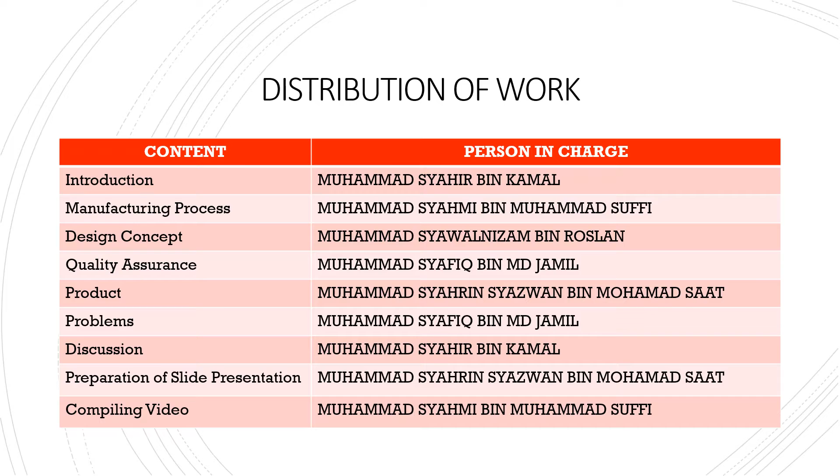We have been given the task to make a desktop research on a particular manufacturing company in Malaysia or abroad. So from our desktop search and discussion among the group members, we have decided to choose this company based in Japan. The name of this company is Kai Group.

In this slide, I'm going to give a basic introduction about this company. Kai Group is a company that forges blades, which has a history of over 800 years in the manufacturing of blades. The Kai Group was founded in Seki City, Gifu, by a man named Saijiro Endo in 1908. The head office for Kai Group was Kai Corporation, situated in Tokyo, Japan. Nowadays, the Kai Group president and COO is Hiroki Endo.

For the next slide, I'm going to give basic information about this company. Kai Group produces forged blades for cutlery, kitchen utensils, beauty care products, confectionery utensils, and many more. The registered capital for this company is about 450 million yen, with 8 industrial buildings in 5 countries, which are the United States of America, Japan, Shanghai, Vietnam, and India. The total number of staff as of April 2020 is around 2,538 people, with 43.9 billion yen in sales as reported in March 2020.

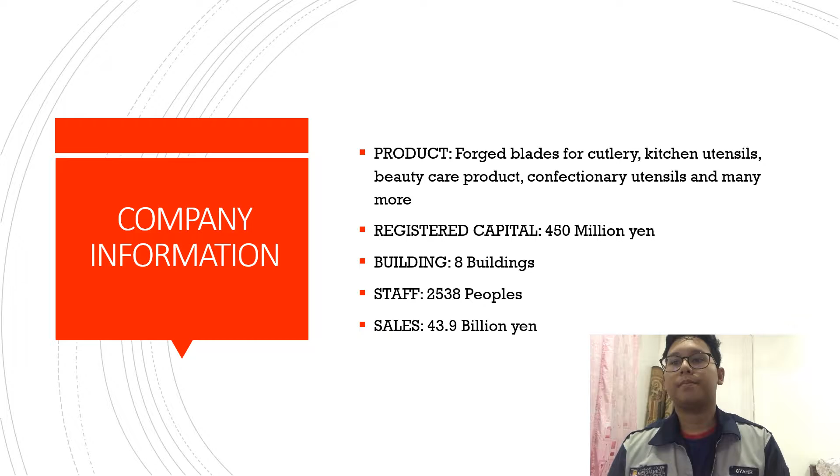Assalamualaikum warahmatullahi wabarakatuh. My name is [name] and I will explain about the manufacturing process that is involved to produce a knife. Firstly, it is about machining.

In this production, there will be 5 processes in machining. Firstly is laser cutting. A laser beam is directed to the material and cuts out the shape of the knife. It is controlled by computer where it will get finely cut, but it requires more time than the press working process.

Next is the thermal process. The workpiece that had been cut is heated at 1000 degrees Celsius in an electric furnace and then cooled off at water temperature. The knife structure becomes hard. After being cooled, the blade is heated again at 180 degrees Celsius. Blades become not only hard and tough but also elastic.

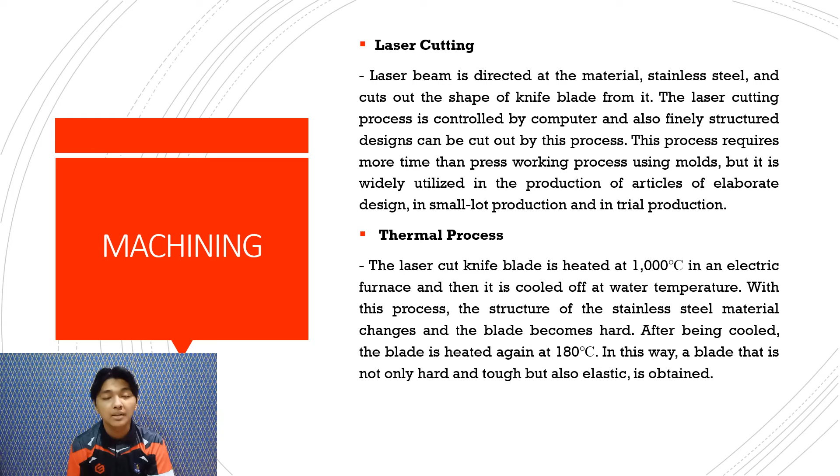Next is surface grinding. The periphery of the blade is polished with a polishing belt. The surface of the blade tip is thinly grinded. This process is important as it allows the blade to obtain a beautiful pattern.

Next is blade leveling or grazing. This process consists of polishing the blade tip with a particular polishing material, making it take the shape of a smooth hard clam. The entire blade is more finely polished.

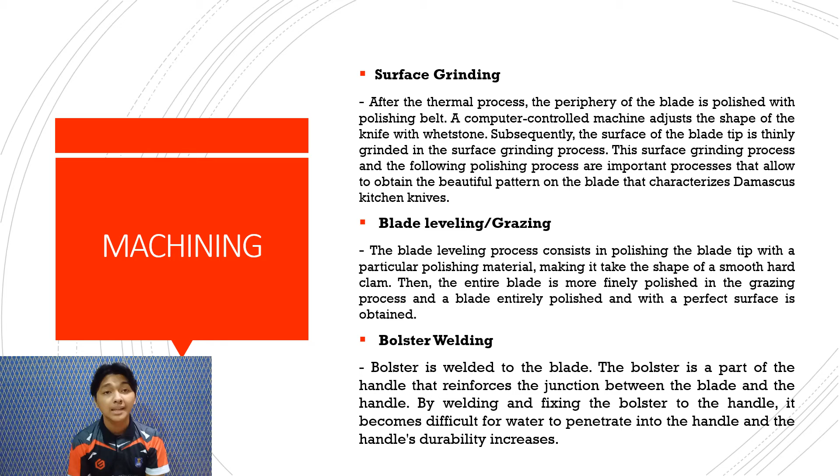Lastly, in machining is bolster welding. The bolster is welded to the blade. The bolster is part of the handle that reinforces the junction between the blade and the handle. By welding and fixing the bolsters to the handle, it becomes difficult for water to penetrate, and the handle's durability increases.

The next major process is assembly. In the assembling process, the handle and rear bolsters are fitted to the blade. Laminated wood is used as the material for the handle as it is excellently water resistant. To prevent the penetration of water, sealing materials are used.

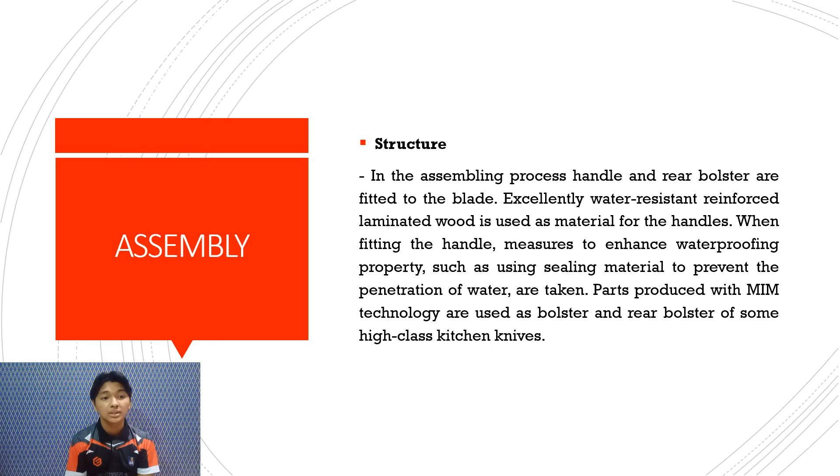The last major process to produce a knife is finishing. In finishing, there will be 5 processes involved. Firstly is mirror polishing or abrasive blast. The blade is inserted between 2 rolls and is polished until it reflects an image like a mirror.

Then, abrasive blasting process is done by spraying glass bead on it. The difference of surface roughness of soft parts and hard parts of the stainless steel is unique, giving the stratiform characteristic Damascus kitchen knives. The second process is wood handle polishing or bolster polishing.

This process is polishing the handle of assembled knives. The bolster and the rear bolster will obtain a beautiful smooth handle.

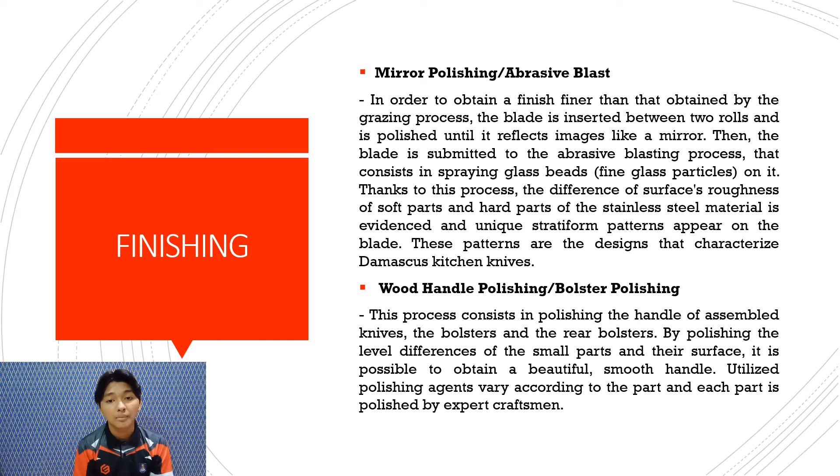The third process is printing and marking. Each kitchen knife has a mark printed on it which indicates its brand name and the lot number that enables identification of its manufacturing date. It enables identifying the history of utilized materials, and the date and time when each process was carried out.

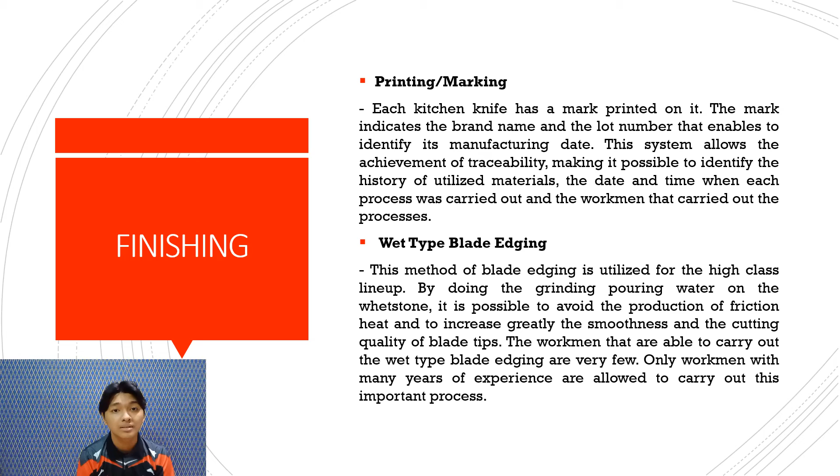The fourth process is wet type blade edging. This method of blade finishing is utilized for the high class lineup by doing the grinding, pouring water on the whetstone. It is possible to avoid the production of friction and heat, and to greatly increase the smoothness and cutting quality of the blade tips.

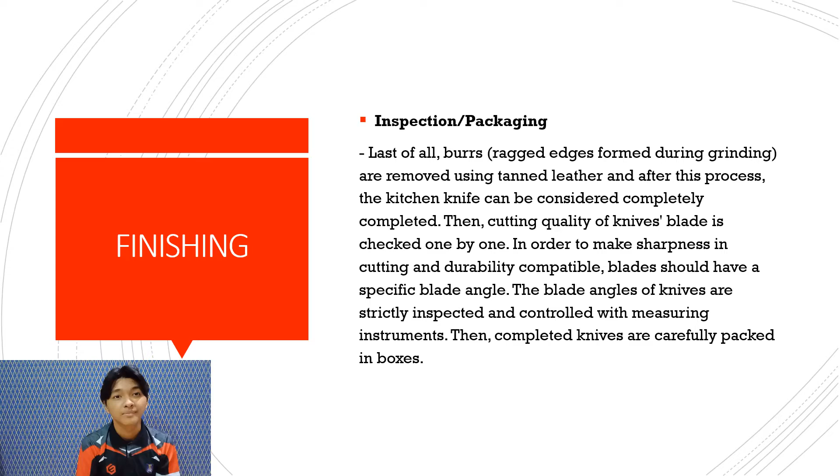The design concept of kitchen knife for Kai Group started with identifying the specific usage for the customer. The customer needs the kitchen knife to cut different things, which encouraged Kai Group to come up with new ideas for the kitchen knife design. This is because each thing to be cut has different stiffness, thickness, curve and size, which leads to producing different parameters and colors of the kitchen knife.

At the design level, the design process starts with sketching the idea. All ideas were laid out on paper to figure out the functional aspect. Once the basic concept suitable for the design has been chosen, the sketches were scanned and brought into computer-aided design software such as CATIA and SolidWorks.

From there, the sketch starts laying out the functional geometry in two-dimensional form, drawing the profile of the knife and adding the pivot location. Then the blade was checked to make sure it can open and fit in the handle. It needs utmost precision throughout the entire manufacturing process to make sure the blade fits with the handle.

Once all the process work out, the design of the kitchen knife was turned into a 3D model.

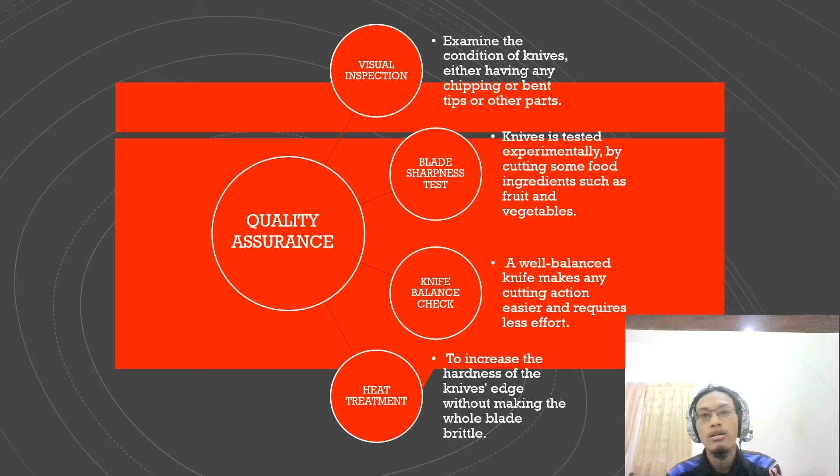Quality assurance can be defined as any systematic process of determining whether a product or service meets the specific requirement that ensures the product is reliable and functional to the customers. Here I will describe further a couple of quality assurance measures that this company might have done to ensure their product is the finest and functional once it reaches the customer.

Firstly is the visual inspection, where they examine the condition of the knife, whether it's having any defects such as chipping or bent tips. Secondly is the blade sharpness test, where they test the knife experimentally by cutting some food ingredients such as fruits and vegetables. Next, they check the knife balance.

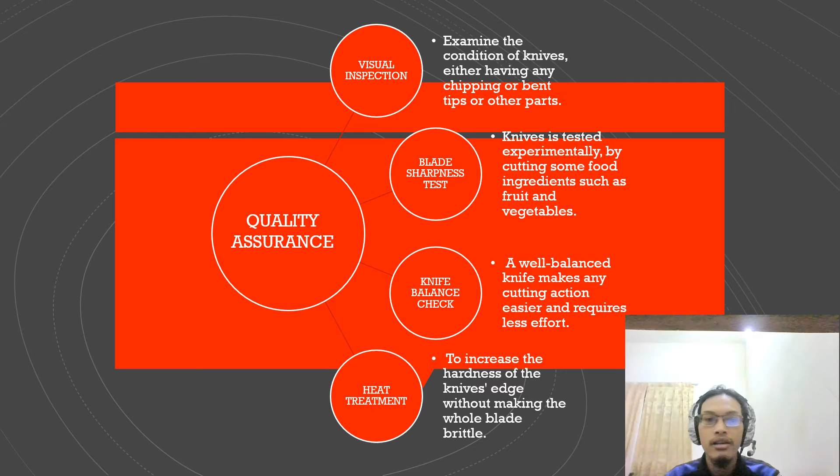This is to ensure the knife is well balanced in terms of weight, the ratio of the handle and the knife blade, so that it makes the cutting action easier and requires much less effort. Last but not least, they do a heat treatment to ensure the hardness of the blade is much tougher, without making the whole blade brittle.

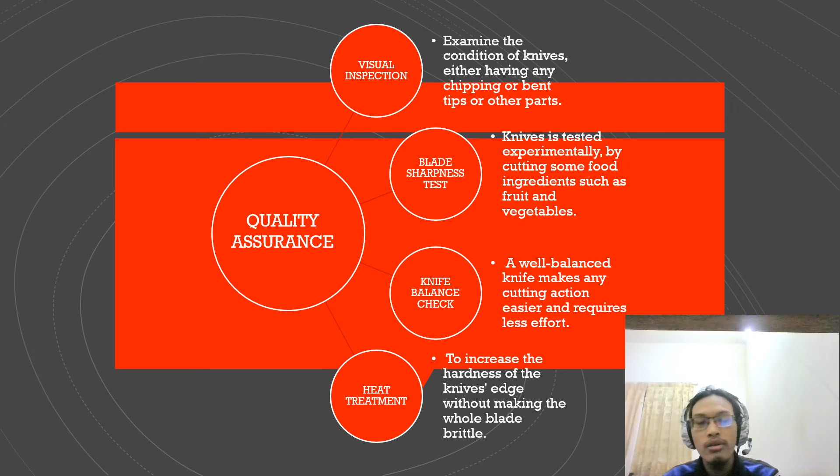Based on my search, Kai Group has produced some products such as razor, scissors, kitchen knife, and nail clippers. But in our assignment, we will explain about kitchen knife. In Kai Group, there are several companies that produce kitchen knife. One of them is Shun Company, while the other one is Sekimagoroku Company.

Both of the companies have produced some series for their kitchen knife. In Shun Company, one of the series is Shun Premier, which the blade material is VG10 stainless steel, while the knife handle uses a symmetric oval walnut wood composite design which can prevent the knife from slipping from the hand. This series of knife can be known by its hammer finish pattern, which has its own function of avoiding sticky knife.

An example for this series is the Shun PM paring knife 4 that can be used for peeling fruit and cutting vegetables, and the other one is the Shun PM utility knife 6.5 that's suitable for peeling fruit and cutting meat. This example can be shown in the image in the presentation.

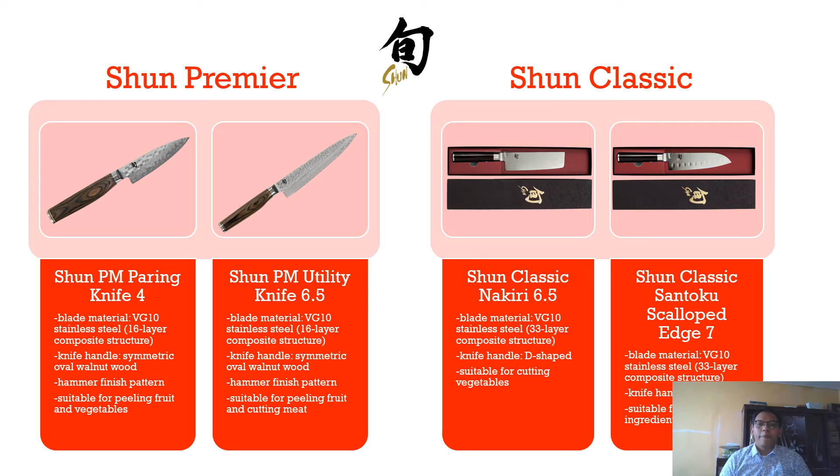In Sekimagoroku Company, one of the series is Sekimanju. The material of the blade used for this series is stainless steel, while the handle is made from plastic or polypropylene, which can handle heat up to 110 degrees Celsius.

An example from the series is the Sekimanju Nakiri knife, 165 mm, which has a sensitive cutting edge and compact blade that's easier for cutting vegetables. The other one is the Sekimanju chef knife, 180 mm, designed for conventional western style use such as shredding vegetables and cutting, slicing and cubing meat.

The other series is the cleaver knife. The material used for the blade is cutlery steel, while the handle has a D-shaped design, which gives it an ergonomic design and makes it easy to grip.

An example for this series is the meat cleaver, 7-inch, 3.5 mm, which is suitable for processing hard bones such as ribs and chicken bones. The other one is the sharp point Chinese cleaver, 7-inch, 2.5 mm, which has a smaller size suitable for women or beginner cooks.

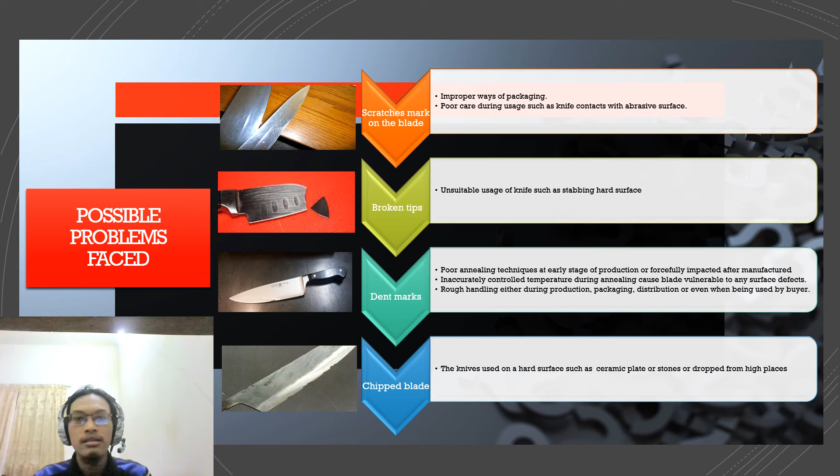Secondly is the broken tip, where the user might misuse the knife by stabbing the tip on a hard surface such as rocks and others.

Next is the dent mark, due to poor annealing technique at an early stage of production or forceful impact after manufacture. It might also be caused by inaccurately controlled temperature during annealing, making the blade vulnerable to surface defects, or due to rough handling during production, packaging, distribution, or use.

Last but not least, the blade might have a chipped edge where the knife is used on a hard surface such as a ceramic plate or stones, or dropped from a high place.

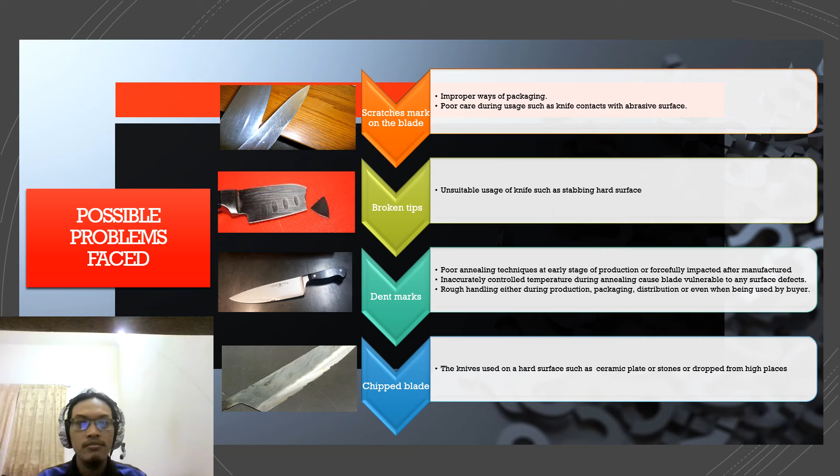So the product that we have chosen for this assignment is kitchen knives. From the findings, we have described the process to produce kitchen knives, which are laser cutting, thermal process,

grinding, brazing, welding, polishing, edging, and finishing. All these processes need to be done carefully in order to achieve the right size and dimension, to make sure the quality of the knife is always at the top level.

There is an alternative for Kai Group to produce the kitchen knives with less cost. The suggestion is to replace the laser technology with a press working process using a mold. One of the biggest advantages of using a mold is in terms of time, as this process is much faster than laser cutting and produces a lot of knives in a short time.

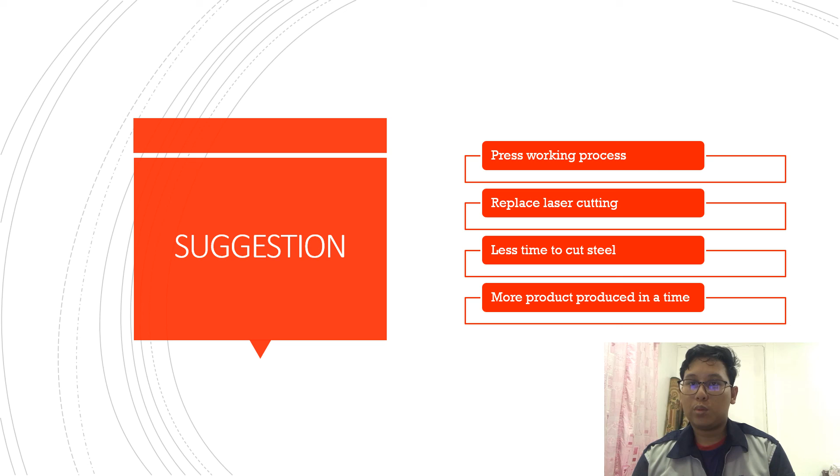In Germany, a company named Zwilling J.A. Henckels has used this method for a long time. The molding process has been proven to be an alternative machining process for Kai Group to consider in the future. So the reason why we choose the laser cutting process to be replaced is due to its disadvantages.

One of the disadvantages of the laser cutting process is in terms of time, as it requires more time being a long process. The other reason we choose laser cutting is due to the cost of the machine.

Laser cutting machines can cost upwards of $1 million, but Kai Group is a well-known company around the world, so in terms of cost it will not be a problem for them. But they could consider using another manufacturing process in the future, and one of the suggestions we made is using a mold process.